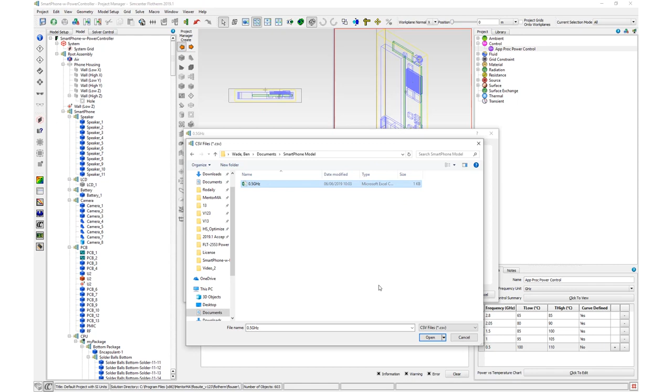The title of this dialog is the frequency being edited. In this dialog, temperature power data can be manually inputted or inputted from a CSV file. When finished, select OK to save your changes and exit this window.

To inspect all defined frequencies, select Control Summary. This shows a plot of all defined frequency curves with T-low shown as blue and T-high shown as red, plotted for each curve. For a transient analysis, if T-sensor is higher than T-high, then the controller switches to the next

lowest defined frequency. If T-sensor is lower than T-low, then the controller switches to the next highest defined frequency. The frequency is updated once every time step. For steady-state analysis, the frequency does not change. The starting frequency is used for the entire simulation.

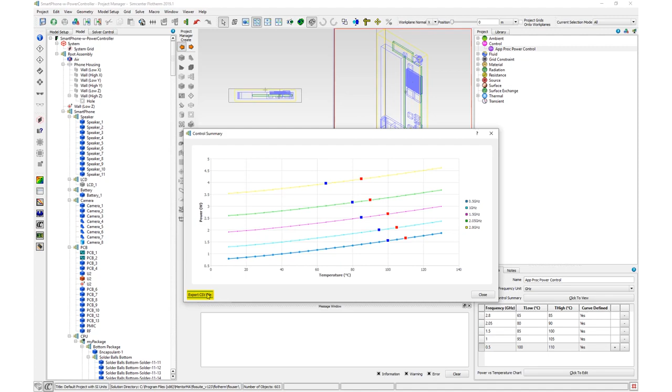All of this data can be exported to CSV for external processing by selecting Export CSV File in the bottom left of this dialog. Now that the attribute is defined, we will set up the object. Create a new controller object in your source assembly. Simply highlight the source and monitor point, then drag into the new controller.

You can also create a new monitor point and source within the controller using Project Manager Create. When a source is a child of a controller, its attached power is ignored. On the Construction tab, attach the control attribute from the drop-down, then select a starting frequency from that attribute. The current frequency field will only be populated when a project is solved.

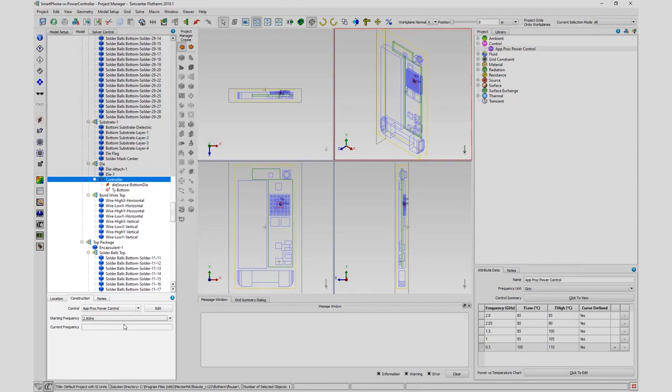After that project is solved, we can inspect tables to see the results. On the monitor point tables, the controller power and controller frequency tabs display power and frequency data of each controller for each time step. Using data exported from the Control Summary dialog and Visual Editor monitor point tables, controller behavior can be easily plotted.